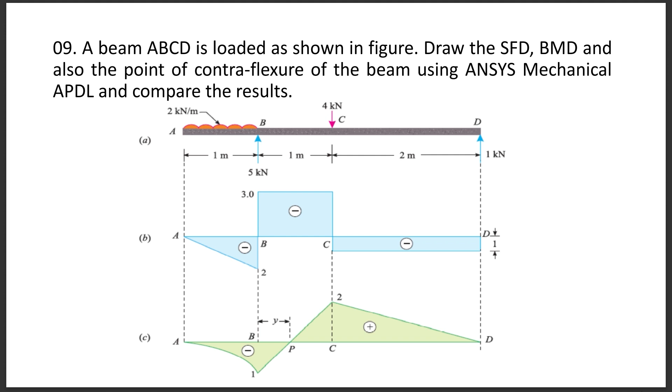Let us close this. First, we need to create a directory and save everything in it. Next, we need to change the title, which comes from File, Change Title, and we can name it FEA9.

To see the title, use Plot, Replot - it will show the title at the lower left corner. It is visible there.

Now we need to select the type of analysis, which comes from Preferences. It is a structural analysis.

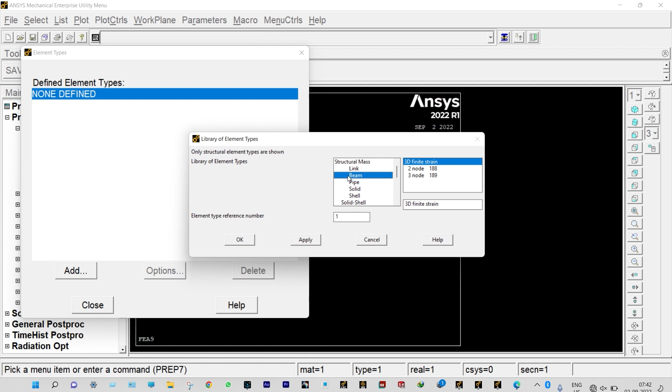Next, we need to provide elemental properties, which comes from Preprocessor. So, Element Type, Add/Edit/Delete - we add it, and we are considering Beam with 3D finite strain, with element type reference number 1. From Options, we select element behavior as cubic form.

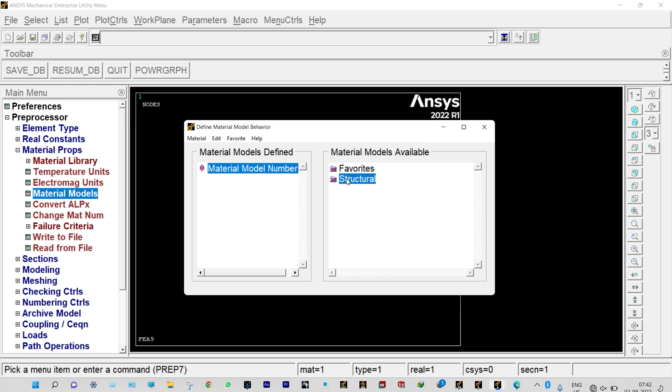Let us close it. Next, we need to provide material properties. Our material has a modulus of elasticity of 2E11 Newton per meter square and Poisson's ratio of 0.3. So, Material Models: Structural, Linear, Elastic, Isotropic - modulus of elasticity is 2E11 and Poisson's ratio is 0.3.

Let us close this. Now, Sections, Beam, Common Sections. As usual, it will have a breadth of 0.01 meter and height also 0.01 meter - it is a square cross section, so breadth equals 0.01 meter and height equals 0.01 meter.

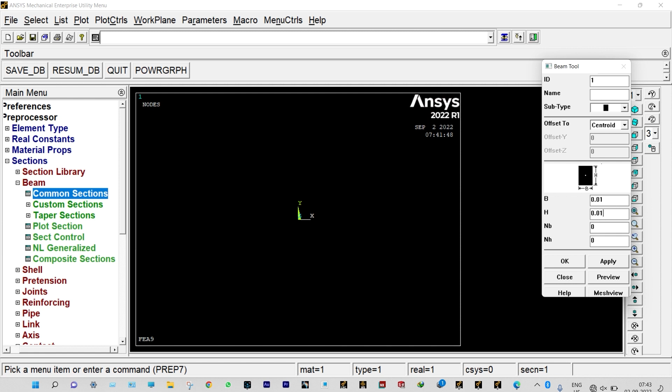Done. Next, we need to start modeling, and it's better to create key points in the active coordinate system. Let us see the drawing again for the location of key points.

The total span of this beam is 4 meters. The first key point will be created at the origin, the second at a distance of 1 meter from the origin, the third at 2 meters, and the fourth at 4 meters from the origin. So the positions are 0, 1, 2 and 4.

So first we create a key point at the origin, apply. Second, at a distance of 1 meter, apply. Third, at 2 meters, apply. Fourth, at 4 meters, apply.

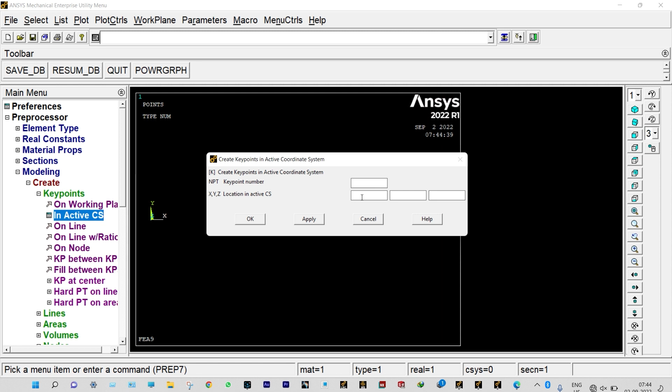Now, for orientation of the beam, let us select one specific key point at x equal to 0 and y equal to -2. Okay, all the key points are made.

Now we need to join all these key points in the form of a line. So, Lines, Straight Lines - select key point 1 and 2, then key point 2 and 3, and finally key point 3 and 4. All the lines are joined.

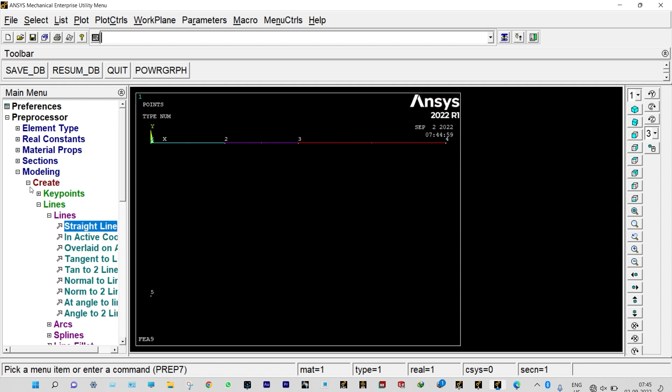Next, we need to mesh it. So, Meshing, Mesh Attributes, and we need to consider the extra key point 5 for the orientation of the beam. We select all lines, and that key point is taken into consideration for this orientation.

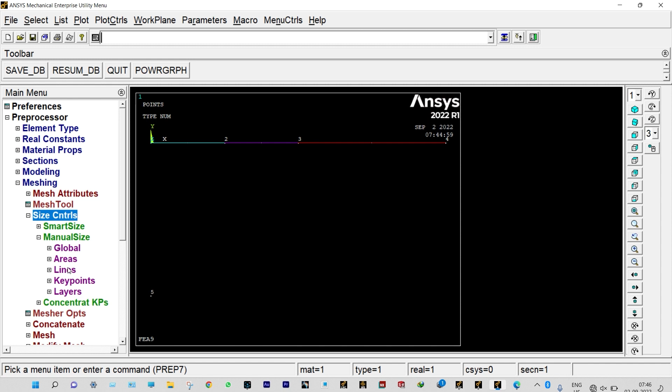Now we need to select size controls for meshing, considering manual size and lines. Let us select all lines, and we consider the number of elemental divisions for each line equal to 10. For better meshing we could use more divisions, but here we consider only 10.

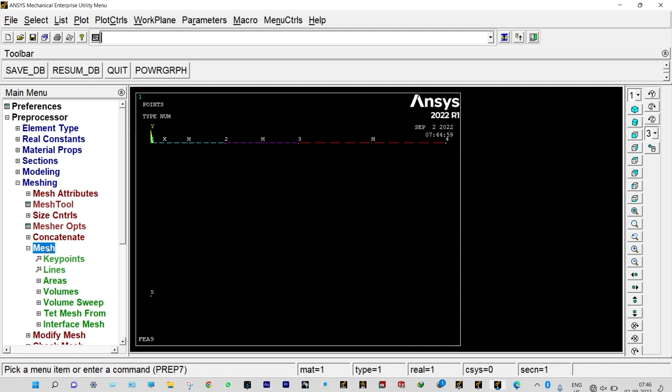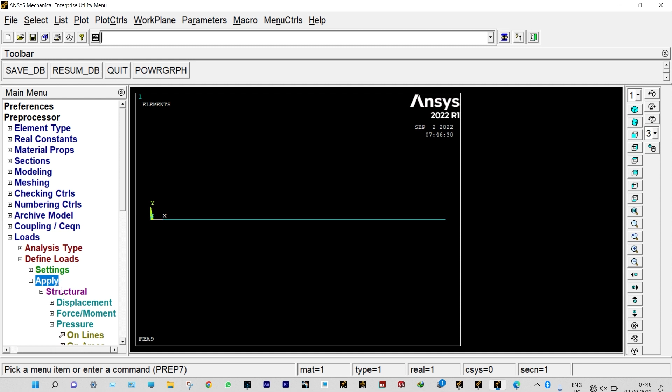Now finally we can mesh it - Lines, Pick All - meshing is done. Now we need to apply our boundary conditions, starting from Loading, Analysis Type - it is a new analysis, and it is a static structural analysis. Next, we define loads, apply structural displacement on key points.

For that we need to select the specific lines. So plot lines, one support will be there at this location and another will be at this location, right? So apply on key points. We need to select specific locations. Let us select the extreme right hand side node, apply.

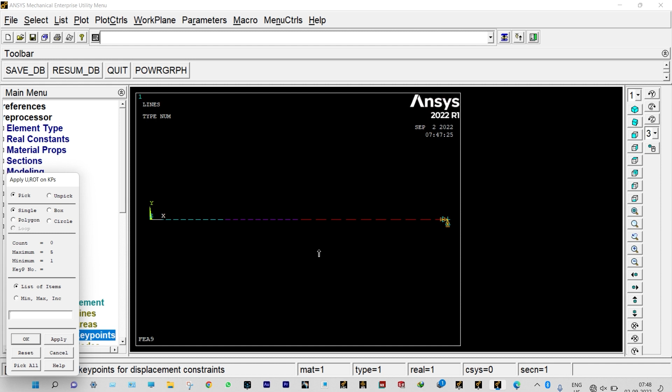Now the second one will be applied at this location. Selected. Okay. And here in this case it will be restricted to move along Y and Z, and also restricted rotation along X and Y. Done. Next to that we need to apply our specific loading.

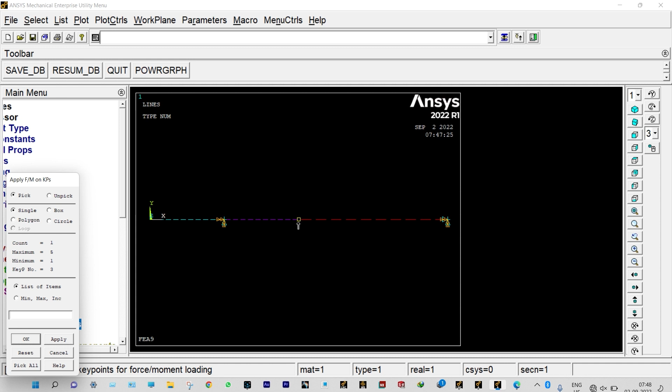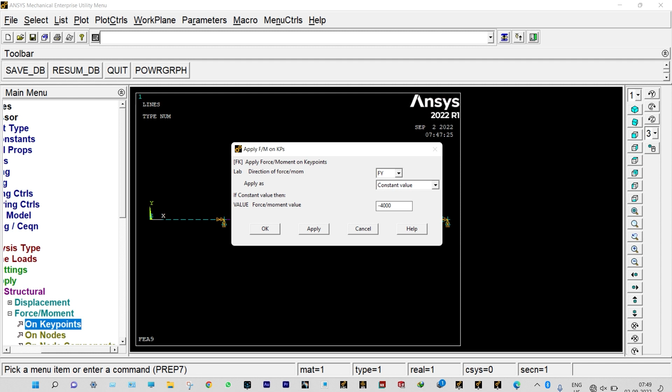So force moment on key points. Let us select this location. Okay, and the force is along Y direction, it is Fy, and the loading is 4000 Newton. As it is in the downward direction, it will be minus 4000 Newton, or 4 kilonewton. Okay, it is applied at this location.

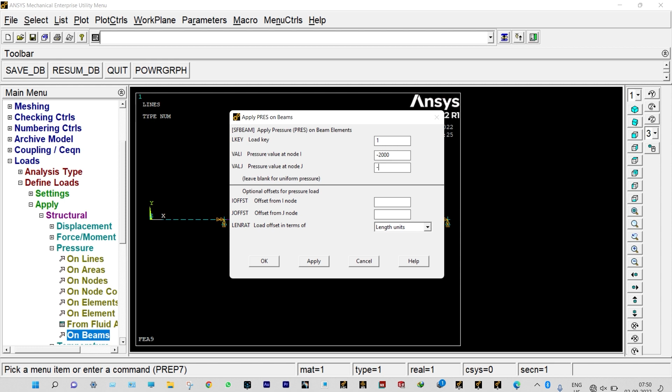Now the uniform distributed loading will be applied at the extreme left hand side, spanning from this location to that location. So pressure on beams, you can select a box for selecting all the nodes. Selected. Okay, and as it is in the downward direction, it will be minus 2000 at node number 1, and it will be finishing also with the same value, minus 2000. Okay, done. So we applied all our required boundary conditions.

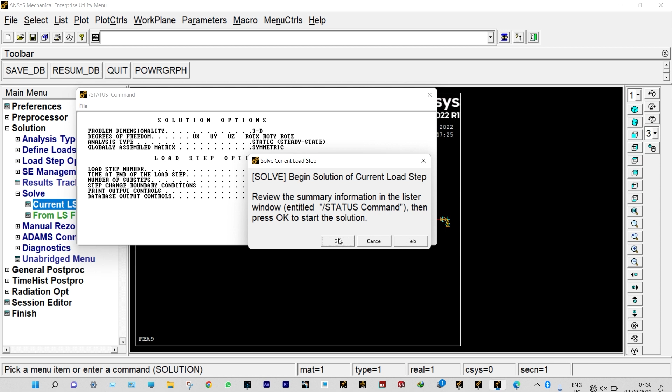Now we can solve it. So solution, solve current LS. If everything is right, it will show solution is done. Okay, so it is showing solution is done, so everything is perfect. We can see our results from general post-processing. Okay, so let us close it.

In general post-processing, first of all we need to read our results from the last set. Next to that we need to create the elemental table, element table, define table. We need to add it, and we know that for seeing the bending moment and shear force we need to depend on specific numbers. For bending moment we need to depend on SMIS 2 and SMIS 15. Similarly for shear force you need to depend on numbers like SMIS 5 and SMIS 18, right?

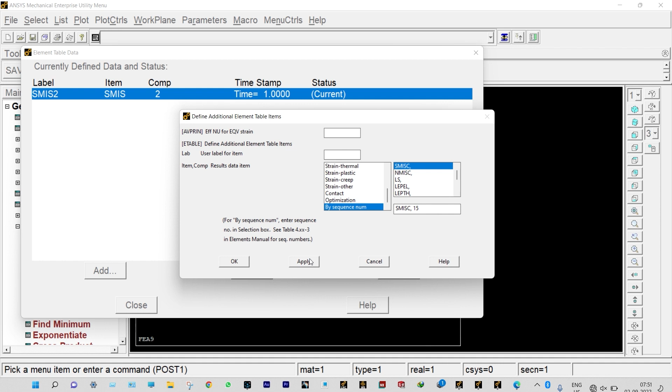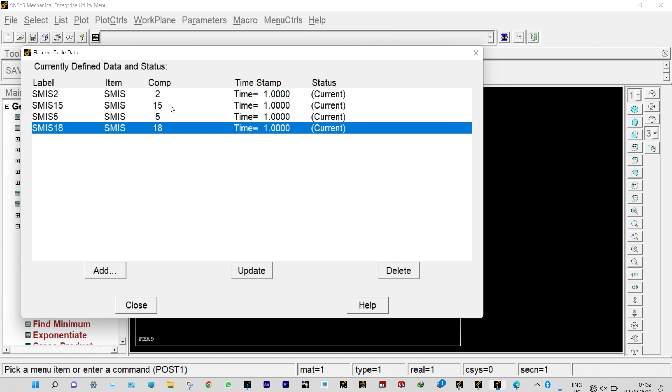So from the drop down menu we can select by sequence number, and it will be SMIS 2 for bending moment. Apply, and the next one again by sequence number, SMIS 15 for bending moment. Applied. The third one again by sequence number, and it will be SMIS 5. Apply, and the last one again by sequence number, and it will be SMIS 18. So we selected all the numbers, SMIS 2 and 15 for bending moment and SMIS 5 and 18 for shear force. Okay, let us close it.

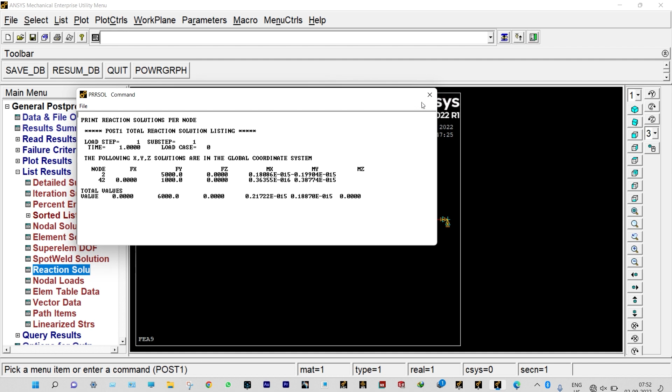Now we want to see our results from listing. So list results, and first of all we want to see the reaction solution. Let us select all items, and you can see that maximum reaction is occurring at node number 2. It is 5000 Newton, and at node number 42 it is 1000 Newton, right? You can see the question paper also again. It is 5000 and 1000 Newton, right?

Let us see the question paper. It is also showing exactly the same thing. It is showing at B it is 5000 Newton, or 5 kilonewton, and at the extreme right hand side it is 1 kilonewton or 1000 Newton, right? Okay. Next to that we'll see our results of bending moment and shear force together with listing results, right?

You can see element table data, and let us select all the numbers, SMIS 2 and 15 for bending moment, and again SMIS 5 and 18 for shear force. We want to see all the results together.

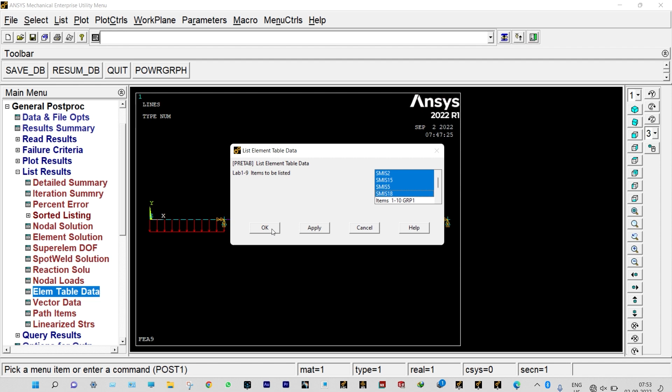Okay, we can see here we're having a total of 30 numbers of nodes, and in each case you can see shear force and bending moment diagrams. The first two columns, represented by SMIS 2 and SMIS 15, will represent the bending moment diagram, and the third and fourth columns, represented by SMIS 5 and SMIS 18, will represent the shear force diagram, and each point or each node is representing shear force and bending moment at specific locations.

You can see here at the left hand side, maximum bending moment is occurring at node number 21. It is 2000 Newton meter, or 2 kilonewton meter, and the minimum is occurring at node number 11. It is minus 1000 Newton meter, or minus 1 kilonewton meter. Similarly, maximum shear force is occurring at node number 11. It is 3000 Newton, or 3 kilonewton, and the minimum is occurring at node number 10. It is minus 1800 Newton.

Let us see this one from the question paper itself.

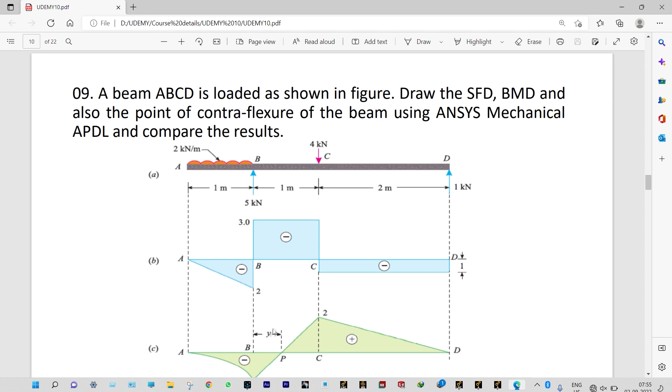It is showing that maximum bending moment is actually 2 kilonewton occurring at location C, and minimum is 1 kilonewton occurring at B. Shear force also shows maximum shear force is 3 kilonewton and minimum is 2 kilonewton.

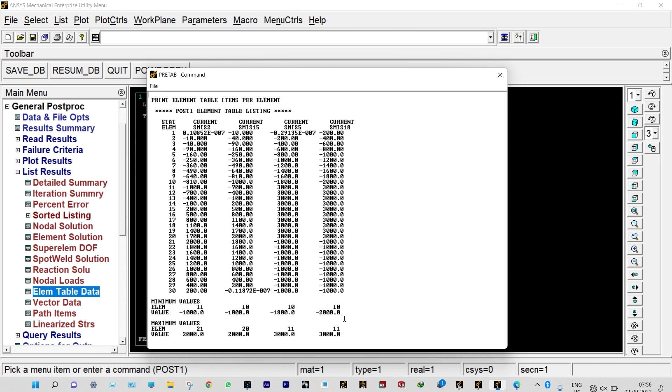So we can check it here itself. Maximum is occurring at node number 11, it is 3 kilonewton or 3000 Newton, and minimum is occurring at node number 10, it is minus 2000 Newton or minus 2 kilonewton. So it is exactly same as what we got in our theoretical results, right?

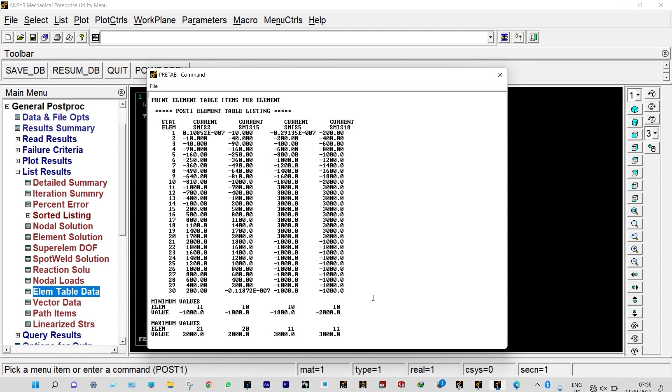Next we want to plot our results. So plot results, can do plot line elemental response, and we want to see bending moments. So it will be SMIS 2 and SMIS 15.

You can see this from our question also, it is showing exactly the same. Maximum is 2 kilonewton meter and minimum is 1 kilonewton meter. It is exactly same. Now we want to see the point of contraflexure.

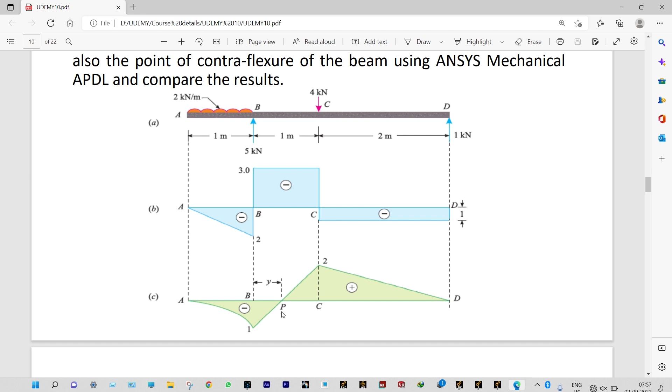That means the location where the bending moment changes its sign. It is at location P, so that is to be shown from ANSYS mechanical. This is the point of contraflexure. To see it clearly, we can show the node numbers also.

So it is very close to 25. We can find the point of contraflexure. To have better results, we can go for better meshing. In that case the node will be passing through this specific location of point of contraflexure, and we can find better results, right?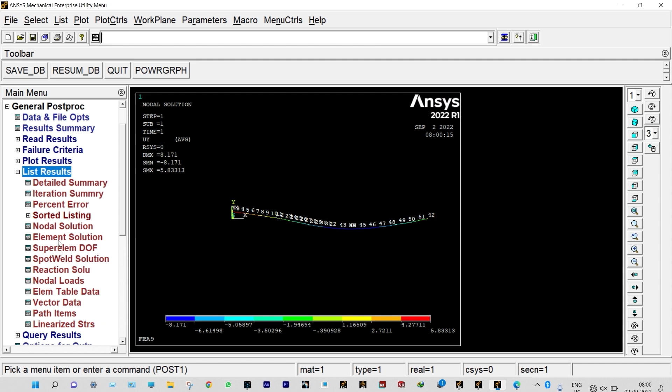And that can be viewed in the form of a listing also. So we go for list results, nodal solution, DOF solution, and we want to see y component of displacement, showing displacement of defined nodes. You can see that maximum displacement is occurring at node number 44, it is minus 8.1710.

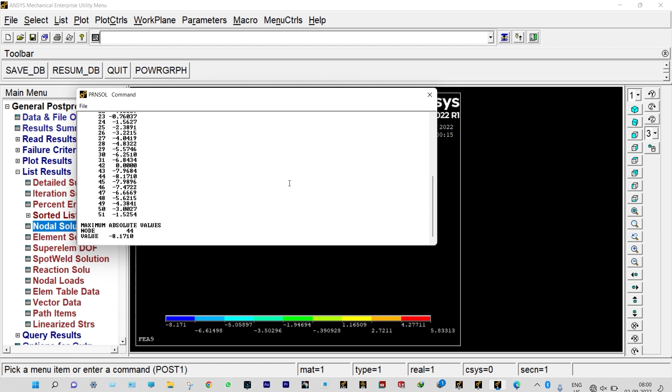At node number 44 we can look at that node also. At node number 44 maximum displacement is occurring. Let us see that location, node number 44. It is at this location. So here at this location we are having maximum displacement, right?

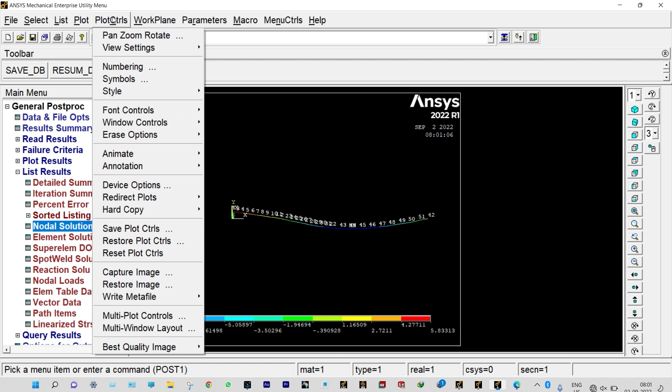Okay, fine. Next we want to see the animation of this beam. For that, we need to see the solid beam or the beam in 3D format, checked from here. Plot controls, style, size and shape, and display of elements should be on. You can see this is the beam in 3D format.

For better understanding, you can see the oblique view. So this is the beam in 3D format with a specific cross section of 0.1 meter by 0.1 meter, right?

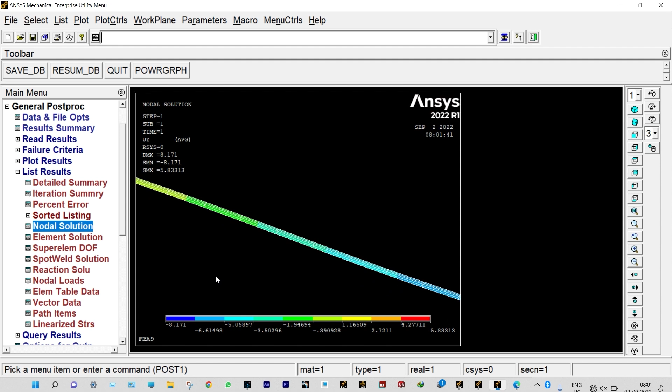Now I want to see the animation of this one. So plot controls, animate, deform results, and with the default setup we want to see the displacement in y direction, uy. You can see how the beam is vibrating.

To see the vibration or deformation in a better way, let us change the delay period. So this way the beam will be vibrating, right? Let us close this one.

So this is all about today's video. This was a very simple analysis of an overhanging beam under uniformly distributed load and also one concentrated point load. In this analysis, we found the shear force and bending moment diagram and also the point of contraflexure, and that was validated or compared with the theoretical results, and we found the exact same solution as in our theoretical result. So this is all about today's video.